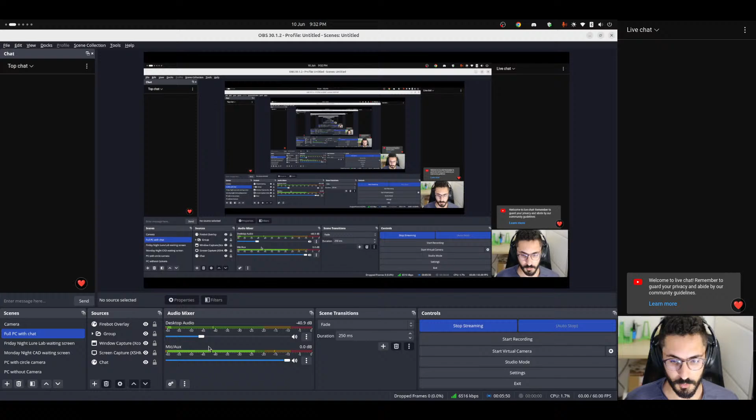No, didn't work. Wait. Okay, it's working. I don't know what's with this camera. It wasn't working on Friday, and then yesterday we did a Twitch stream for like 6 hours and it didn't freeze once. I have no idea what's going on with it. Let me open my chat so I can reply to you guys. Oh, why isn't it opening? What? What's wrong today? Okay, cool. We can start. It was a wild day.

So where did we stop last time? We were building this lure turner for making fishing lures, and we're almost done, by the way. We need a couple of things here just to refresh my memory. I should probably prepare before the stream, but yeah, what the hell.

So we still have to add this part right here, which is gonna have a ball bearing. I'm thinking it could have two ball bearings because the previous version had one and it could wobble a bit, so adding a second one would be a great idea. So two ball bearings here, and we need something to attach the hook to.

I'm thinking I'm gonna go the same route I went with the previous lure turner, which is making it as a screw, modeling it as a screw on both sides, from this side and from this side. And as I said, two ball bearings so it can rotate.

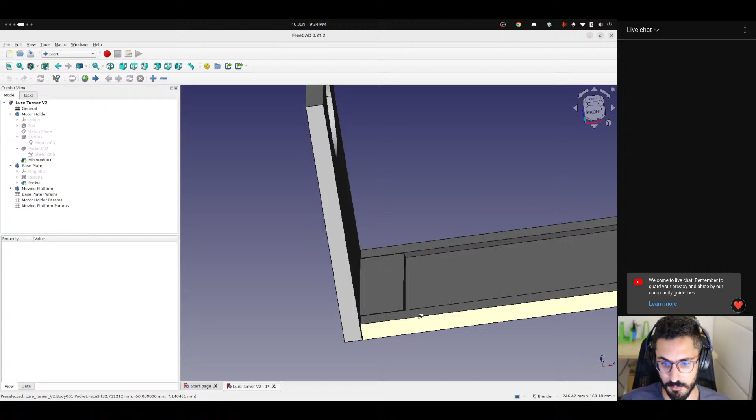Let's see, I might add support to this to make it more stable. Maybe something like this goes from here to here to support it. What else do we need to do? What else?

Just to give you a heads up, today I'm not thinking straight at all. Actually, here's a story. So I had an appointment this morning. I had two things actually, one at the office and another at the ministry.

So I had to be at the office at like 9:30 in the morning, and then at the ministry I had to be there by 1:45. So I went to the office, it's like about 10 a.m. or something like that, I've finished my thing. And I know the appointment at the ministry is at 1:45, but somehow in my head things got mixed up, and I was like, okay, I need to be there in 2 hours, but it's like 4 or 5 hours ahead. I'm like, I need to be there in 2 hours, I don't know how I calculated this. So I texted my wife, hey, you need to be here in like an hour. So yeah, we spent about 4 hours just wandering around.

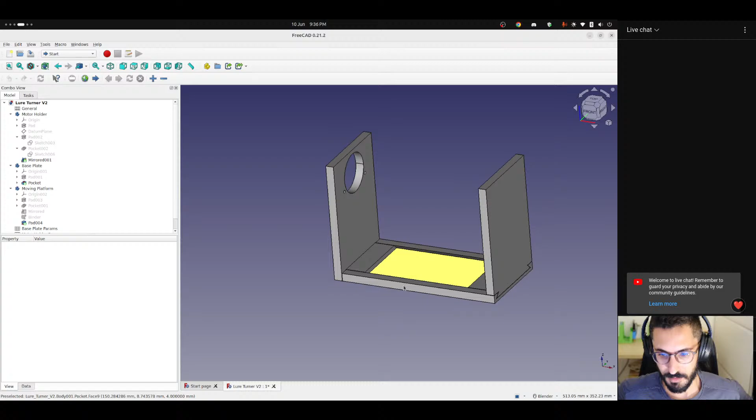What else do we need to do? Yes, it's an important one. So we decided that these moving platforms, or the base plates, we can stack them up. We can have 2, 3, 4, however long we want it to be, we can stack them up. So we need some way to attach two of these together.

Yeah, let's see what we can do. Hopefully we can finish all of this today. So what do we start with? I'm guessing we can start with this.

Let me just refresh my memory on how we did this, motor holder parameters. Motor offset from top is 5, and then we have a motor diameter, and then we calculated some values here, this screw hole distance, motor offset from top. Okay, and how did we do...

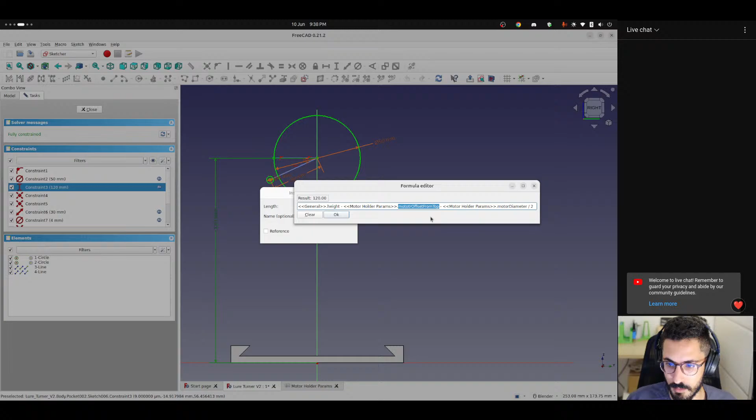This sketch? Yes, Z value here, what was it? It was the height minus motor offset from top minus motor diameter divided by 2.

Hello, I just joined. What kind of motor are you planning to use? Okay, hello Odd Lures, and the motor that we're planning to use is called... was it asynchronous or synchronous?

Yeah, this one, this thing, it doesn't have to be this exact model. There's like millions of them on Chinese websites, but yeah, it's an AC motor, sorry. I guess it could be 110 volts or something, the US voltage. But the shape I think will remain the same, and we're doing it parametrically, so I can show you. Everything here is parametric, we can change anything.

Let's see, base plate, I forgot the parameters. I can change the height, for example, to like 250, and then everything will re-render. Okay, I have a sketch that I forgot to hide. What was it? 150. I'm gonna leave it at 150 for now.

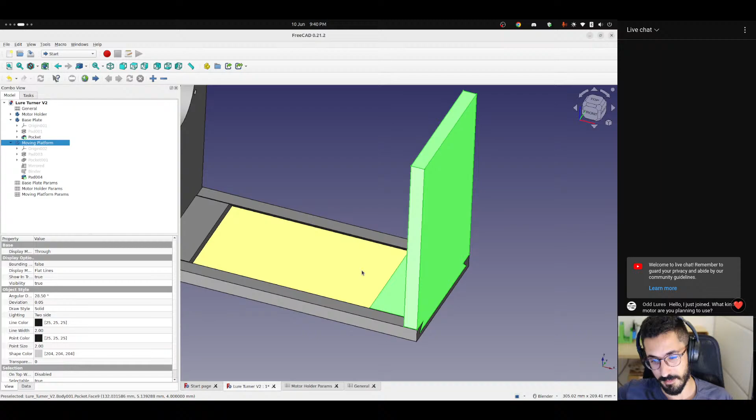But yeah, we can change anything, and the plan is, as I was saying, this part right here, the moving platform, it's not static, it moves actually on this platform. And the plan is to have as many of these moving platforms as necessary, so you could put one lure on this platform and then put another lure on another one behind it, and then somehow we need to let them attract each other.

So I'm thinking it's either gonna be like a screw here and then you squeeze it by hand and tighten it down, or we can have rubber bands going from this one to this one. It doesn't have to be a rubber band, it could be a spring, for example, connecting this part to this part, and then you can stretch it, put the lure in the middle and let it go.

And you can do the same with the rest, and then you can have like 10 lures rotating on the same motor. That's the plan. And it doesn't have to be one lure, because we're gonna create attachments, so we can make an attachment, for example, that can hold 2 or 3 lures on the same platform.

Nice, I have just tested FreeCAD a bit. Beginner in CAD, I used to designing masters in Blender, so this will be some good learning for me.

Yeah, so FreeCAD definitely has a steep learning curve, but once you get the hang of it, it becomes super easy. They already merged lots of fixes to the master branch on GitHub, so it should be released soon, version 1.0, which is the first stable version of FreeCAD, hopefully, and it's gonna be awesome. They're doing lots of work on user experience, especially for newcomers.

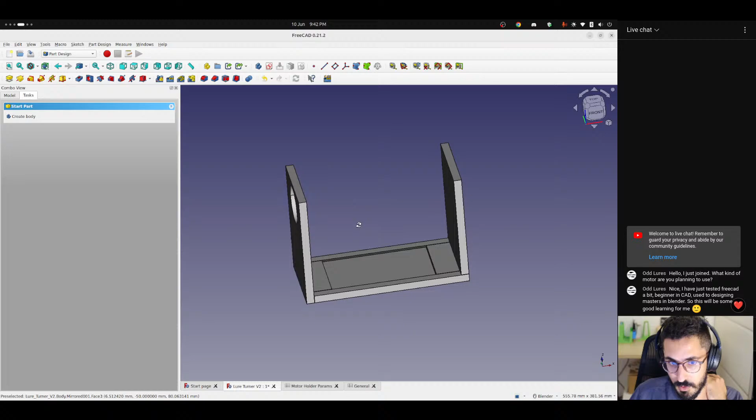But for now, basically, I have a rule: never select a face and draw a sketch on it, never reference an edge, never do any of that, because in the current version of FreeCAD, you can technically do it, but it might break everything if you modify something. That's the only way at the moment to achieve a parametric model, is to draw everything according to parameters and not referencing anything.

Like, for example, this motor right here, motor hole, if we check the sketch, we can see that it has a height and a diameter, and these heights and diameters, we have them here. We're referencing them from separate spreadsheets. Now we're gonna do the same for the hole that we're gonna do here.

So let's do that. Moving platform parameters. So at the moment, for the moving platform, we only have the rail length, which is, let's set this to 60, which is this thing here.

So we need to add the hole. Let's see, moving platform parameters. But do we need to add it here, or should we create a new spreadsheet for it, because it's another part? It's a different part.

I think we're gonna create a new spreadsheet. Let's create a new one. Let's call this the tool. What are we gonna call it? Tool what? Basically, it's gonna be a screw that will hold some attachments. Not tool, let's call it the rotating bit or something. Rotating screw.

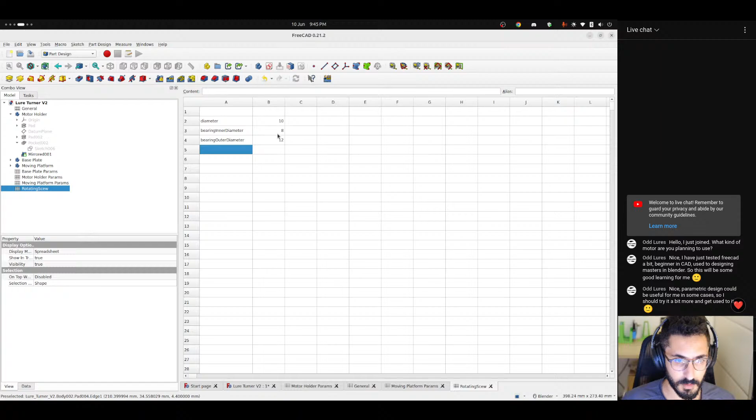Or actually, no, we can have it diameter, bearing inner diameter, bearing outer diameter. So the hole that's gonna be cut here will be based on the bearing diameter. But the diameter of the part itself, it doesn't have to be this, it could be something else. Bearing inner diameter, bearing outer diameter, let's say 8 by 12. I don't know, I'm adding random values. Let's say this is 10. What else do we need? For now, I think this is enough.

And we need to add the aliases, but we need to call them an input for now, similar to what we did in the previous stream. So these are all inputs. We need to validate the input before we can do anything with it. So now let's do that. Usually I use the C field. I don't know why, because I can just hide it like that, so I don't modify it by mistake.

So let's see, what is the minimum value for diameter? Let's see, we need a minimum value of 5. No, maybe bigger, yeah, I think 5 is fine. So we can test that. If we set it to 0, it should be 5. Cool.

And this is gonna be the actual diameter. I love how FreeCAD uses spreadsheets instead of using their own UI and stuff for adding parameters. It's so freaking powerful. You can add tons of formulas, like calculate absolute values and stuff.

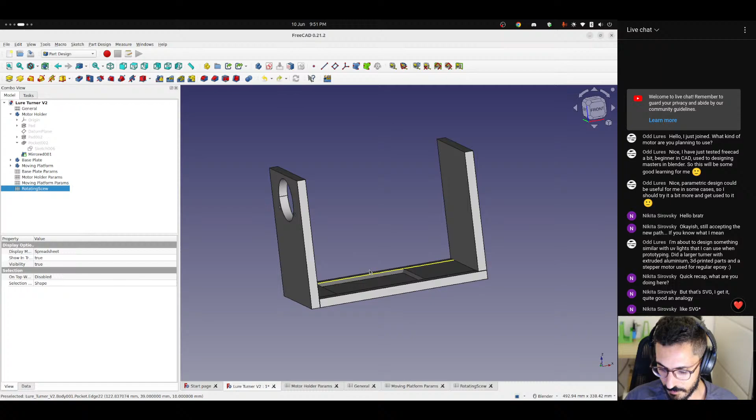But that's SVG, I get it. Quite a good analogy, like SVG, yeah. Definitely a good analogy.

So what we want to do now is the moving platform. We have multiple objects at the moment, this object and this one, and I want to add a cut here. Let me see... I don't have any planes here at the moment, so I need to create a plane. But first, let me see where the origin is. Oh no, we don't need a plane. Cool, so the origin is here.

This is one of the things I also love about FreeCAD: if you're using part design, each object has its own origin, its own X, Y, and Z. If you want to move the object, you go to data, placement. For example, at the moment I have the X position taken from a spreadsheet, but let's move it on the Z axis, and you see the entire thing with its origin moves up. So now we have the origin here, I don't need any extra planes or stuff. I can just create a sketch.

Oops, sorry. Yeah, so we need to activate the body in order to be able to do something with it. XY plane, so now we're drawing on this face right here, and we can do that.

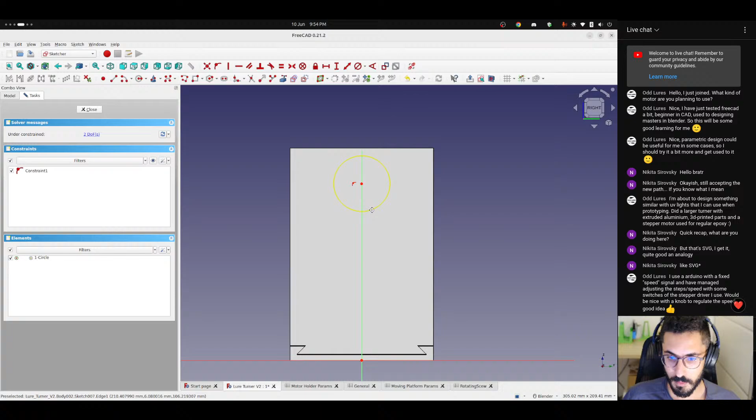I use Arduino with a fixed speed signal and have managed adjusting the step speed with some switches of the stepper driver I use. Would be nice with a knob to regulate the speed. Yeah, the knob is amazing. I mean, if you can do that and put it in a really good package, a production-ready package, you can basically sell it. I guess lots of people would buy it and pay good money for it. Good business idea 2024, don't steal it.

Okay, diameter. So we want this. We want to get it first from the spreadsheet, I called it rotating screw, and we want the bearing outer diameter, but we want to add some tolerance. Now I have a tolerance value in general, but this is not a tight tolerance. For the bearing I want it to be tight, so let's add the bearing tolerance here. It's something like this, a very small value, so we had to hammer it in to put it in place. And let's see, this is gonna be maximum of bearing tolerance input and the value of 0.05.

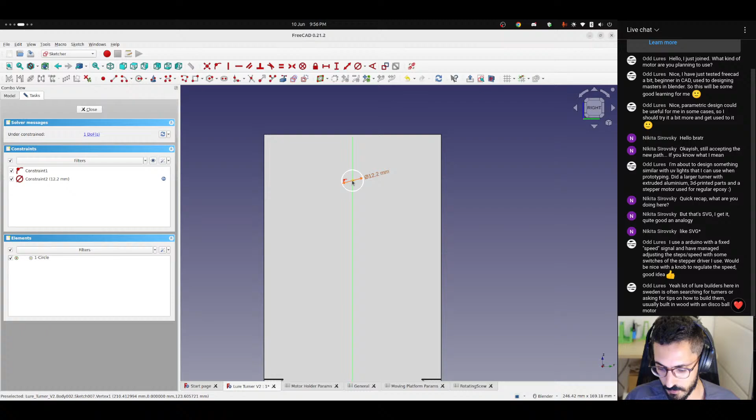Yeah, a lot of lure builders here in Sweden are often searching for turners or asking for tips on how to build them, usually built in wood with a disco. Man, Sweden, I love Sweden. You're from Sweden, you're so lucky. It's like the best, I guess, pike fishing destination. My friend is on a fishing trip to Sweden. I don't know if he's back or not, but he sends me a lot of pike pictures.

Okay, so the height of this is gonna be exactly the same height as the motor. So we did that. How did we do that? We got it from general.height first, so now we're here at the top. And now I remove from it something called... what was the name of the spreadsheet? It was the motor holder params dot, was it offset from top. So now we applied an offset, I think it was like 5 mils or something, but we can change it. And now we need to go down by the radius to get the center. So this offset is more of a margin than an offset, I should probably rename it. And this is gonna be the motor holder params dot motor diameter.

Is it this low? No. Oh, I forgot to divide it by 2. Wait. Huh. No. This one, divided by 2.

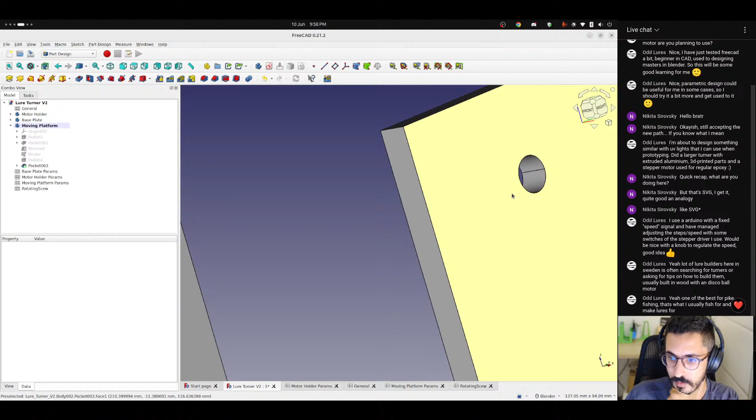Okay, cool. Now one thing we didn't take into consideration is... we didn't take that into consideration. So we have a thickness here, and we have 2 bearings inside, each with a width. I'm guessing we need to modify this so it takes the bearing width into consideration. But we'll do that in a bit.

Yeah, one of the best for pike fishing. That's what I usually fish for and make lures for. Yeah, and you guys have lots of lure builders also, and you guys make amazing lures.

Okay, so let's do that real quick. I think it was this pad right here. This was this. Wait, no, sorry, this was the sketch. Yeah, so this is the pad. And how much are we padding? We have to click it open. Interesting, just 10. Wait, what?

If I go here and change the thickness to 20, what's gonna happen? Recompute failed. Interesting. Okay, looks like I forgot to do some stuff. Let's see. Pad here, it's gonna be general dot thickness.

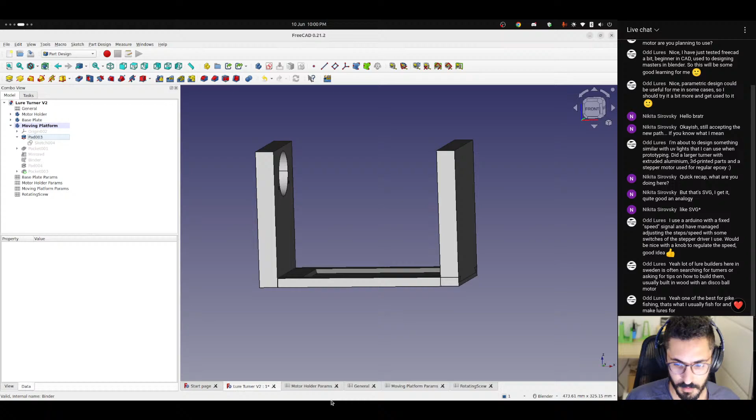And what about the base plate? I think it doesn't have its own thickness. What did I do? Base plate, pad, it's from a sketch, and this 10 is what? Oh, base plate has its own thickness. Okay, close.

So this one should be fine now. Okay, cool, go back to general, change the thickness to 10. Recompute failed. Why? Why did you fail? Huh. Interesting.

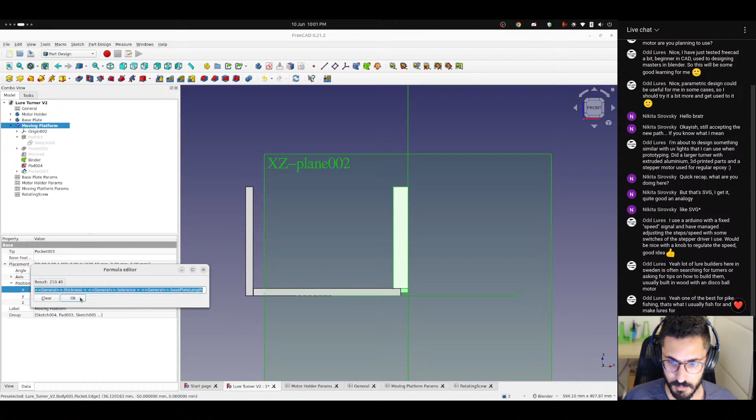So something is wrong here apparently, let me check the position. Let me check how I moved this here. So start by a thickness, then a tolerance, then the length. Yeah, that seems right, but it's in the wrong place. Let me recompute. Recompute failed. Interesting. Moving platform 25. Recompute failed. This shouldn't happen.

It's not changing anything. When I click reverse, it renders correctly. No, it doesn't. Huh. Let's see, how are we gonna debug this? So the origin is wrong also. It should be right here, and there's no reason for it to be back here. Yeah, there's no reason for it to be here.

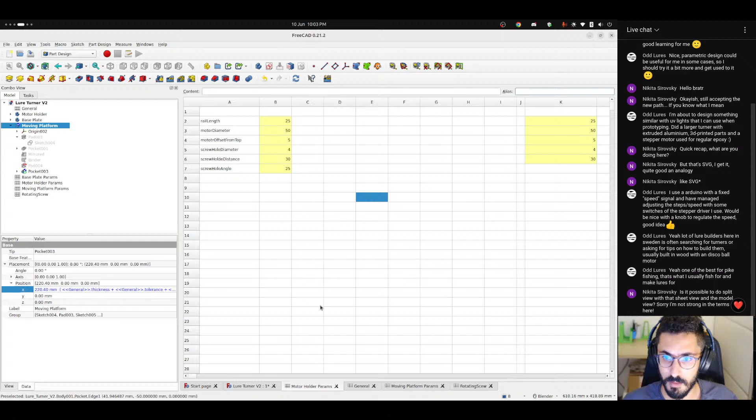Master of over optimization.

Okay, but no, seriously, there's no reason for this to be here. Recompute object failed, what? Okay, this is bad. Why is it here? It should not be here. No. It should not be here. Bad thickness. Okay, but what did I change? This was 10, I changed it back to 10. What?

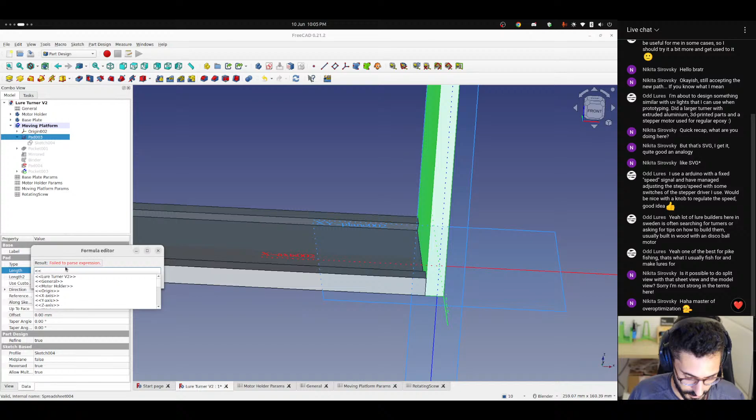General dot thickness. It's gonna be something silly, I know, because today I'm not thinking straight since this morning. I can probably just redo it, but I don't want to do that. Why?

Okay, so coming to here, this binder has the correct placement. It's tolerance plus length plus thickness. That's exactly what we have here. Thickness, tolerance, and length is the same. Wait, what?

Minus thickness? Oh wait, yeah. No. Yeah, no, it should be minus thickness because here we should start from this point and go this way by thickness. So this isn't correct.

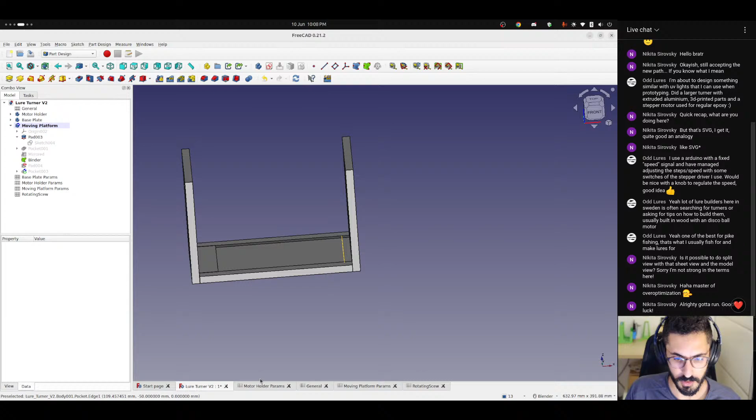No, it shouldn't be like this. No, it's not, still it's not moving anyways no matter what I put here. So tolerance plus general dot thickness. I have to know what's wrong. What did we change? We changed the width, right? We changed this to like 200, and then we reverted it back.

Yeah, looks fine. Huh.

That is the weirdest bug I have seen. And it's probably because... let's see. No.

Oh, wait. Wait. What is this? I think I got it.

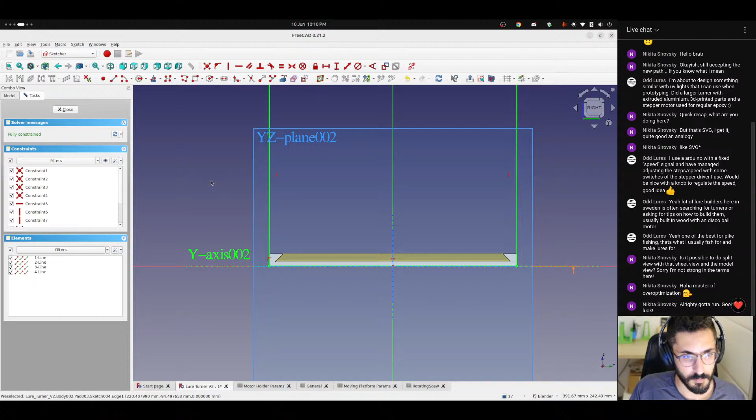Let's see. This is fine here. No, it's fine. So this pocket is fine. Let's hide the binder and the sketch.

Okay, so until this point, it's fine. We mirrored it to the other edge. Okay, we got the binder. Why is the binder in the correct position? But this entire thing is not in the correct position.

Okay, so I deleted the pad for this binder. Now if I pad it again... but that doesn't make sense. I just deleted something and added it again.

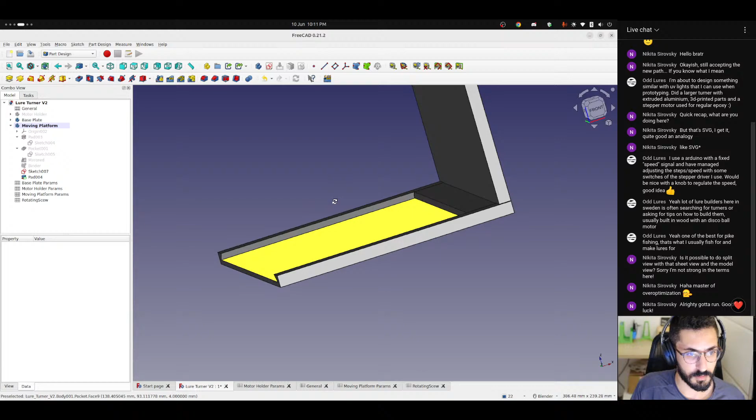Moving platform dot rail length. Okay, now it works. What? I mean, I didn't do anything.

Yeah, things like these is what FreeCAD must fix.

So the model was broken for no reason. It makes no sense. So I deleted the thing it was complaining about and then did it exactly the same way, the exact same way, and it worked.

Anyways. Yes, so now that we have the motor holder—not the motor holder, now that we have this hole done—we can add a new body, and we should probably rename this to rotating screw params.

This will not break anything, right? No, cool. And maybe to follow the naming convention, add spaces. Okay, cool. So now we have a body, but this body is right here at the start. We want to move it here.

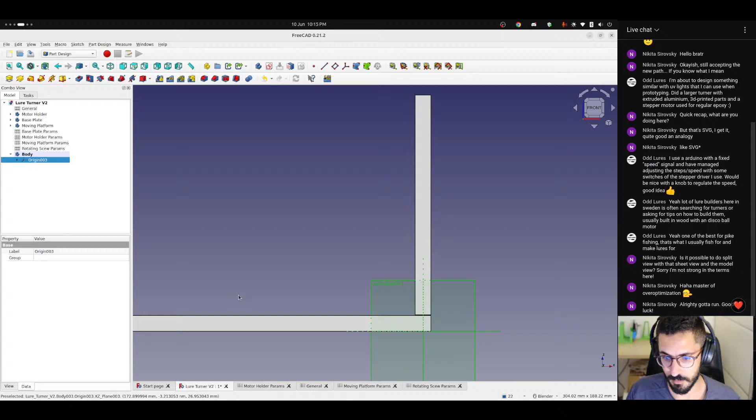We also want to move it up. So in the Z direction of the placement, we want to go up by general dot height minus motor holder params dot offset from top minus motor holder params dot diameter divided by 2, the same value we used to create this and this for the center.

Now it's exactly in the center. So that's from the top view. You can see it in the center, and also from the side view and from the back view. Okay.

Now we need to create some stuff. Let's see what did we define. So we need 2 bearings.

We have a diameter for... we have a bearing outer diameter and a diameter. So it's gonna be—let's do the bearings first, and then it's gonna become more obvious. So we need to put a bearing here and a bearing here. So how are we gonna do this?

We can create... do we want to create an additive cylinder? No, let's just do a sketch. So I'm gonna show the origin again, and if I create a datum plane, then select the YZ plane.

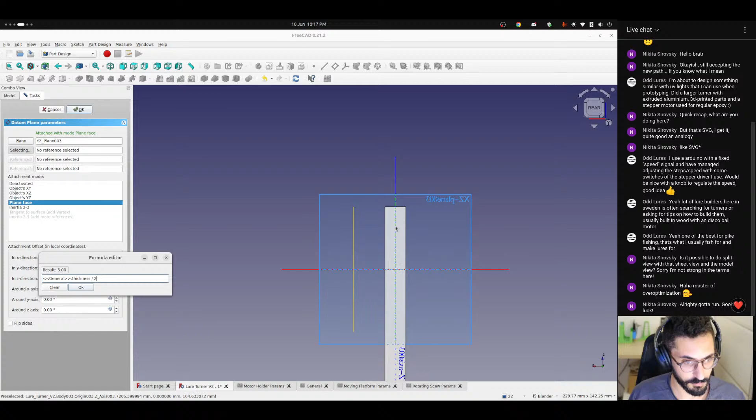Basically by half a thickness, so general dot thickness divided by 2. And now we're here. Let's hide the origin.

Okay, so if I select the datum plane, even though it's hidden, and then click create sketch, we're actually attaching it to this sketch. So we need 2 circles here, the inner and the outer diameter.

Let's constrain the outer diameter first. So this is gonna be, what was it, the rotating screw param dot bearing outer diameter. And the rotating screw params dot bearing inner diameter. Cool. Close it.

Oh wait, we need to call this bearing. Yeah, that's fine.

Interesting. I didn't think this through.

Because the thing with FreeCAD is, in the same body, this blue icon, you cannot have two solids. So now I'm trying to create two bearings and then the part in the middle. But we can't do that actually. My bad, we cannot do that.

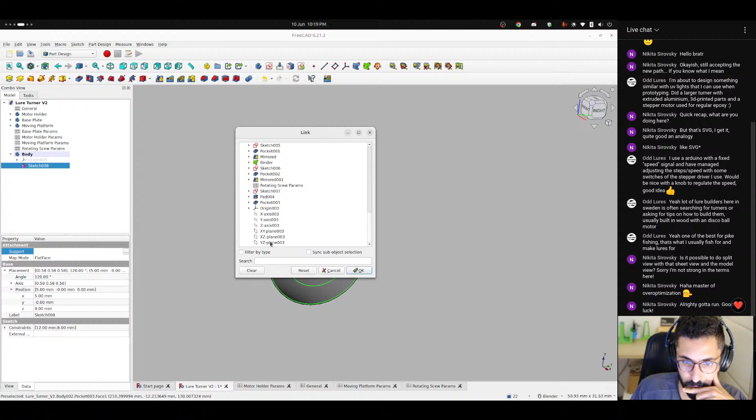It's the YZ plane, I think. Yeah, it's the YZ plane 3. Yes, this one. And now we can move the body in the X direction by thickness. So basically I moved the body here.

And now we can pad this inwards by rotating screw params dot bearing width. Yeah, this is gonna be an issue. We'll fix it in a bit.

Okay, for the other part, we can simply clone it and move it. Let's see. So we can clone the body, and now we want to move it in this direction, which is the X direction. But how much do we want to move it? We want to move it, I think, by the thickness, right? Minus the bearing width.

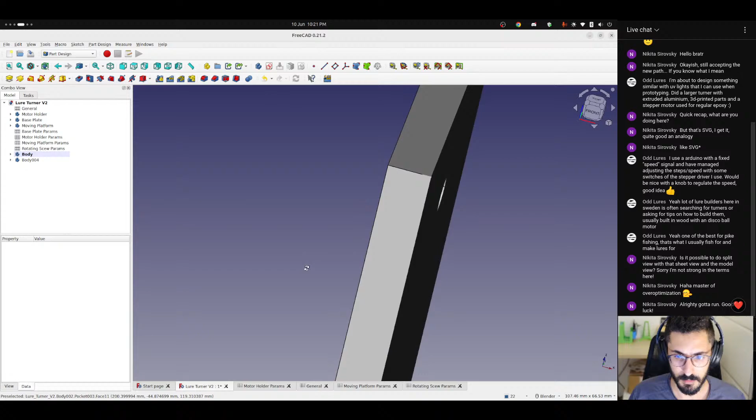Okay, but now the bearings overlap because the bearing width is 6, so 2 of these is 12, but this is 10, so we need to add a condition here.

Now we can change the general condition, or we can make a condition just for this, but I'm gonna change it in general.

So the width, no, the thickness. So what is the minimum thickness? It's going to be a rotating screw. We need to get that from rotating screw params, the bearing width multiplied by 2. This will be exactly 2 bearings, and then let's give a padding between the bearings of 1. So now it's 13. This is our minimum thickness.

But we have a problem. What happened here? Let's see, body 4. This is interesting. Wait, I might have done the calculations wrong.

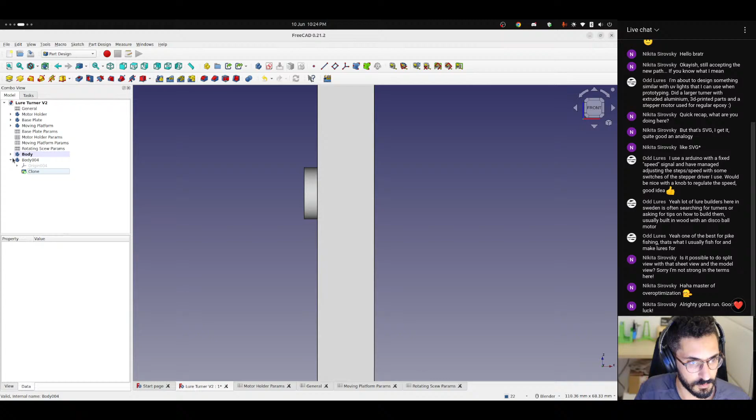Interesting. Position. Oh wait, this is not parametric? Cloning should be parametric. You know what? I don't trust FreeCAD.

I'm gonna create my own body. Move it in the X direction by general dot thickness plus tolerance plus general dot base plate length.

Wait, this is gonna be here. I wanna get it back here, so basically I don't have to add the thickness. Cool.

And in the Z, we need to go by general dot height minus motor holder params dot offset minus motor holder params dot diameter divided by 2.

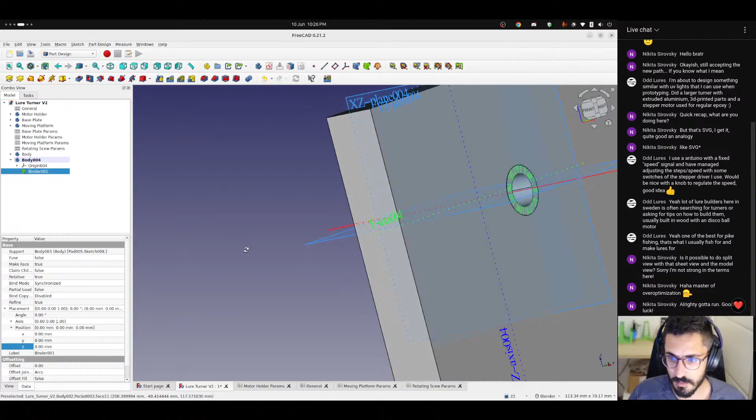Okay, and now we can take this sketch, create a subshape binder, and now we can just move this by... is it minus? I think minus general dot thickness. Let's see.

Yes. Now we can pad this inwards by the rotating screw dot bearing width. So these are the ball bearings. Let's make them smaller. Let's do 4 mil. 6 mil is okay. What now?

Okay, this subshape binder is causing lots of issues. I might stop using subshape binders. Did it work for the bearing? It worked for the bearing for some reason, but down here it doesn't work. So, yeah.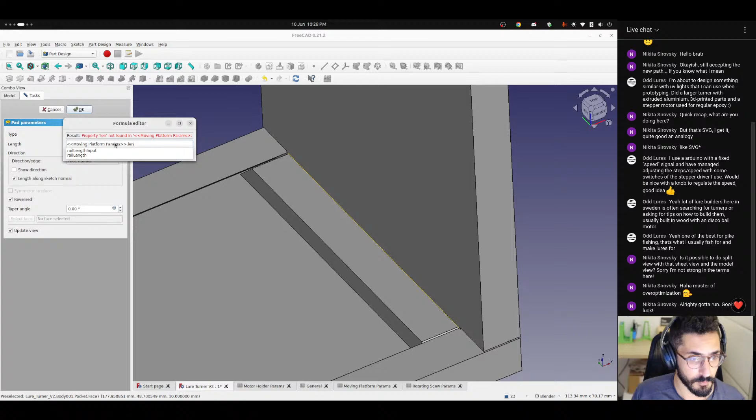We have to remove it. Is the pocket still there? Yeah. Now we can pad this again. Need to make this active or it will not work. Reverse direction. But I have to fix this at some point. I can't just keep deleting it and adding it again. This is the second time I do that.

Okay, anyways, let's ignore this for now. So we have 2 ball bearings. We should probably give the bodies some color. Let's rename this to bearing 1 and this one to bearing 2, and let's click the motor holder.

Random question: do you work or study? How did you get into CAD 3D design?

Thank you for the question, and it's fine even if it's random. Actually, sometimes it helps me concentrate if I'm talking. So I work, I'm a software engineer. And how did I get into CAD? It's because of lures. So I was making fishing lures from wood, but I hated the process of making wooden lures at home.

Yeah, I think red is fine. Not just because it's too much work, too much handwork and stuff, but because it causes a mess and you need lots of tools and stuff.

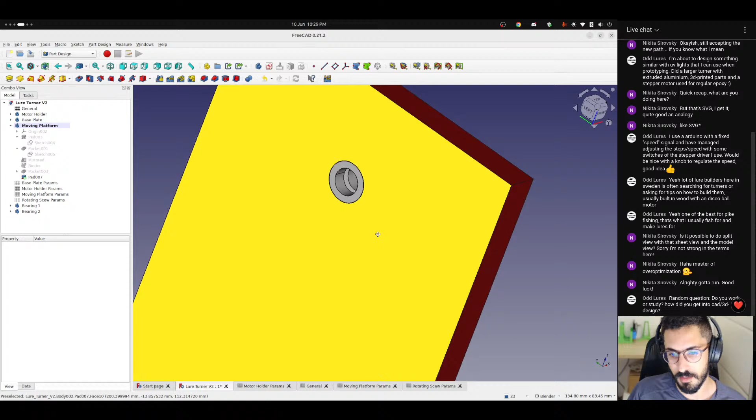So I was like, okay, initially I thought, what if we could CNC machine a lure from wood? Because I saw someone do it on Instagram. I'm like, I'm curious, I want to do that.

I had heard of Fusion before from someone called Malossi Lures. Not someone, they're two brothers, I don't know if you follow them on Instagram, they make amazing saltwater lures.

So I said, you know what, I'm gonna learn Fusion. I did that, I made a lure, and I actually tried to CNC it. I went to someone, gave him the files and told him to do half on one side, then flip the piece of wood and do the other half on the other side. It took a couple of tries, but he did it, and it cost me so much money. I'm like, no, CNC machining is not the way unless I get my own CNC, and then it's gonna be another type of mess.

So that's how I ended up buying a 3D printer. And I enjoyed the process of creating 3D models more than making the actual lures. That's how I ended up here.

And then I was using Fusion 360, but I wanted something where I can own the files, because I was planning on selling the files at first, and with Fusion you need a license for that.

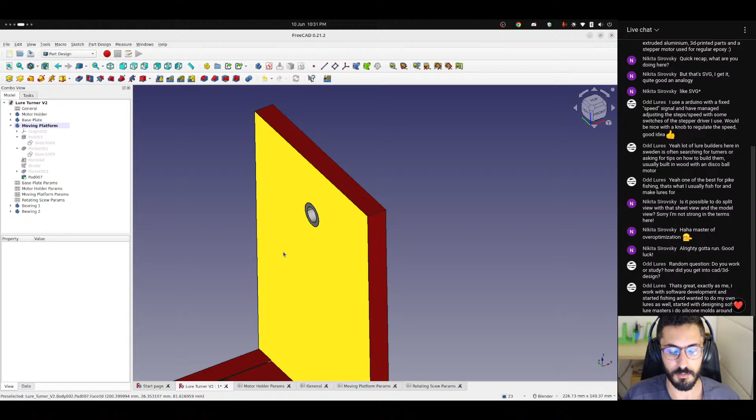So that's how I ended up learning FreeCAD. But FreeCAD for lures is very tricky. I tried to do it, it's not that great for curves and stuff. There are workbenches, like the curves and curved shapes ones. Yeah, these two workbenches, you could probably make a lure from it, or just by lofting a couple of shapes.

But I decided to learn Blender, and when I started using Blender for lures, I just stopped using CAD. Blender is amazing.

That's great, exactly like me. I work with software development and started fishing and wanted to do my own lures as well. Started with designing soft lures, masters, and I do silicone molds around them.

I used Fusion in the beginning as well, but found it's easier to learn Blender. Yeah, I mean, easier to learn Blender.

I think it's not easier, unless you're talking about super complex shapes, then yes, it's easier to make complex shapes in Blender than in Fusion. But I think Fusion is very user friendly, like anyone could use it. Blender, on the other hand, there's a learning curve to it. I mean, we as software devs, tech savvy people, could probably pick it up fast, but other people might struggle a bit.

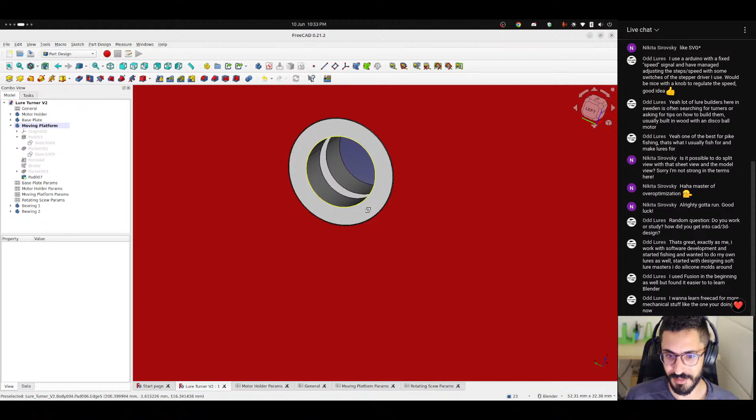Yes, this is exactly how I use FreeCAD for mechanical stuff specifically. And so far, regardless of these random bugs that happen, I should probably save, by the way, because I had a couple of crashes on live streams. Only on live streams, I have no idea why FreeCAD never crashed on me except on live streams. Probably because of OBS and all the stuff that's open on my PC when I'm streaming, but yeah.

So yeah, as I said, when we're working in Part Design, which is the workbench I prefer to work on, it's different than when working with Part, because here every single solid object has to be its own body. So now I want to create the screw thing, so I need to create a new body and probably also move it into place. So again, I need to go to Data, Position, blah blah blah, lots of repetition.

General dot thickness divided by 2, if I remember, then tolerance. Lots of math when doing this.

General dot base. Now this project doesn't have lots of math in it. I had projects where I had to get a piece of pen and paper and start writing math equations to figure out a formula to get something to work. It was cool though, I liked it.

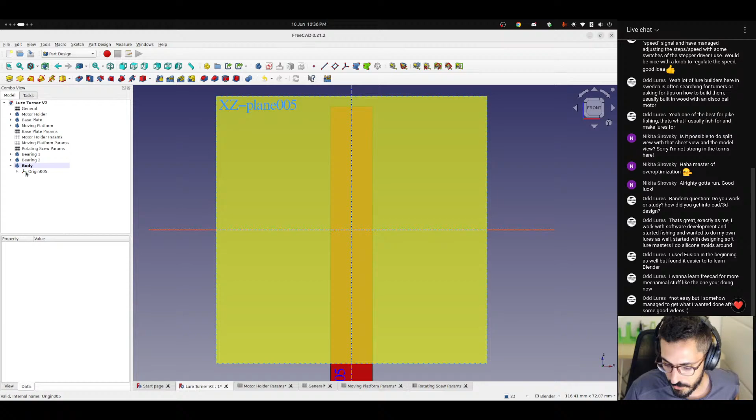Not easy, but I somehow managed to get what I wanted done after some good videos.

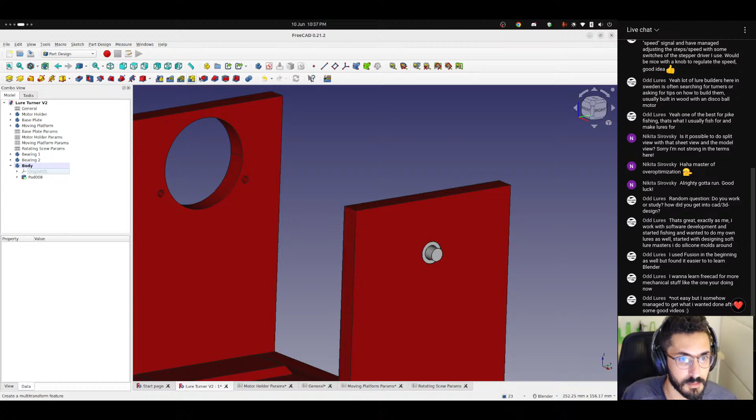Just to see, because I haven't tried it, but I remember I did try it once. It didn't work, maybe it could be something else. So if we do this, then we draw a sketch here, for example. Wait, what? Yeah, sketch here. Why isn't it... okay, now it's working. And then do that.

This is just a test. Let's see, so if we do this, can we mirror both? Mirror. So we need to mirror on the YZ plane. YZ... no, yeah, that's the problem. Oh, because it's mirroring one feature, which is the pad 9.

So if we add a pad 8... oh, okay, we can do that. It's possible, cool. So we can—wait, delete this, delete that, delete this, delete that, delete this. So yeah, we can model everything on one side and then mirror it.

So let's start with adding dimensions. The first thing we need is this section right here, and this is going to be the inner diameter of the bearing. So rotating screw dot bearing inner diameter.

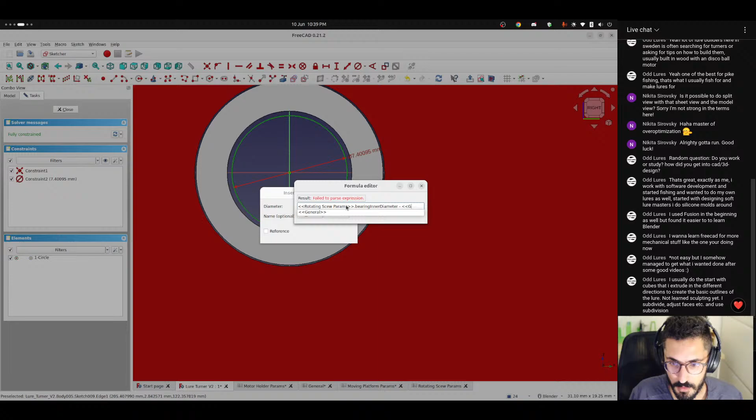But we need some tolerance here. So I remember we had a tolerance, or you know what, I'm going to use the general tolerance multiplied by 2.

I usually do start with cubes that I extrude in different directions to create the basic outline of the lure. I haven't learned sculpting yet — I subdivide, adjust faces, and use subdivision. I get a quite good result, but I'll try to learn some sculpting to improve the details.

Yeah, no, I'm not talking about sculpting. Sculpting will definitely improve the details, but what I'm talking about is I used to do exactly what you're doing — start from a cube, add a couple of lines, right? Subdivide it and then move the vertices.

It's the exact same process, but after you add the subdivision surface modifier, you know what — it's not a Blender tutorial, but what the hell. So if I add a cube, let's apply the scale, always apply the scale. Let's say something like that.

And then you would do something like this, right? And then maybe something like this. Okay, and subdivide, Control 4. Okay, cool. So now you can go ahead and move stuff around to get the shape, and you can also do symmetry here, right?

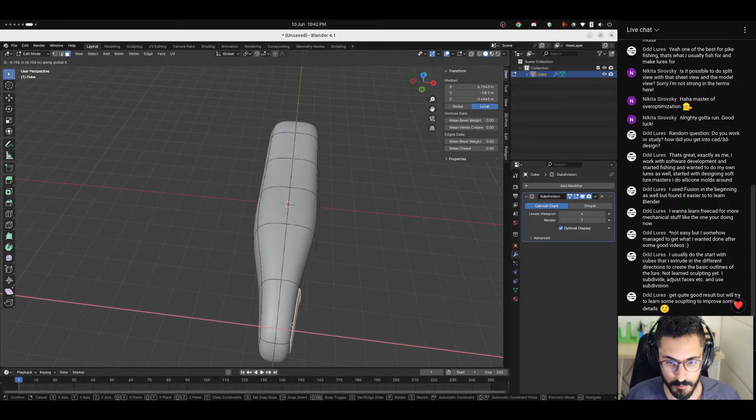Move it down a bit. And then you go to edge select, select this edge, move it down, select this edge right here, move it down, something like that. You can do the same on this side, move it on the X. But I prefer to use edges in this case. See how easy that was?

Anyways, back to mechanical parts. Something is wrong here because this is 0.2, this is 0.1, but it's not actually double. Tolerance times 2. Interesting, let's see what we did wrong.

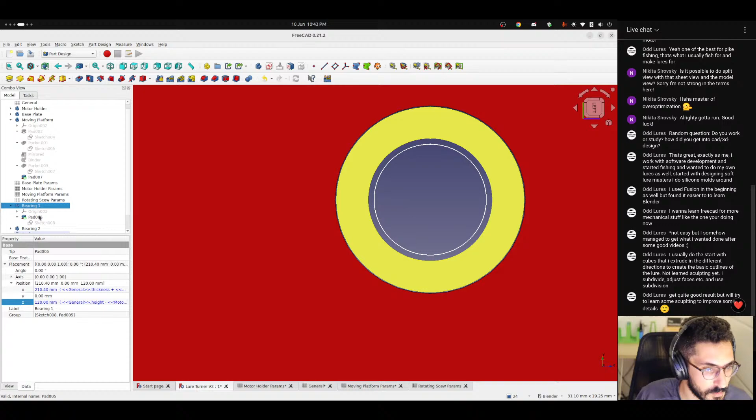Oh, it is, it is times 2. What? Looks... is this the double of this? I don't know, just to be sure — bearing inner diameter. Oh, did I add... did I add anything here? No, anyway, never mind, I could be wrong. Maybe it's... maybe it is.

So we need to pad it. Which way do we go first? Should we go outwards or inwards? Let's go inwards, so pad it inwards. We need to go until this face right here, and then some tolerance ahead of it. So that's going to be thickness — no, general dot thickness divided by 2 plus the tolerance.

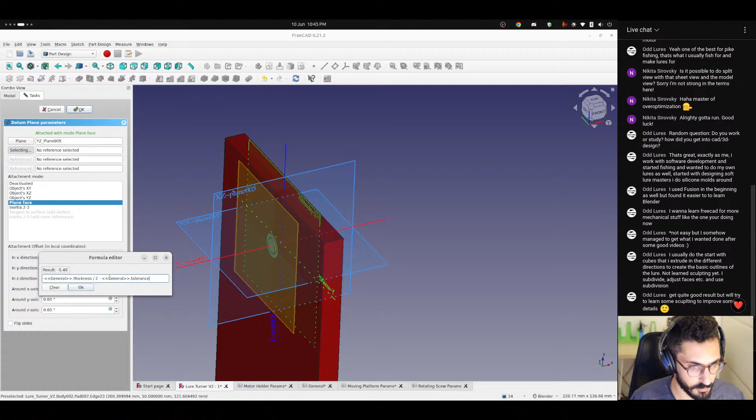Okay. And now, what was the weird bug? It's gone. And now we need to create a datum plane, attach it to this plane right here, move it in the Z direction, negative Z direction, by the same amount that we did — so general dot thickness divided by 2 minus general dot tolerance. Okay, hide the origin, hide the plane, create a sketch.

And this is going to be our actual... what was it called, the rotating thing, the diameter. This is the actual diameter of the screw. And we don't have, at the moment, a screw length. Let's do 10 or 15.

It's our input, and the output will be, basically the way how I do it with complex forms. That's very useful. We'll try to join the live stream. Missed the last one, that looks interesting.

Yeah, the last one was interesting, but I messed up the scales a bit, even though I did them manually one by one, which should create better scales, but for some reason they don't look better. The best scales I did was this lure right here. I think the reason they were this good was because the scales are big.

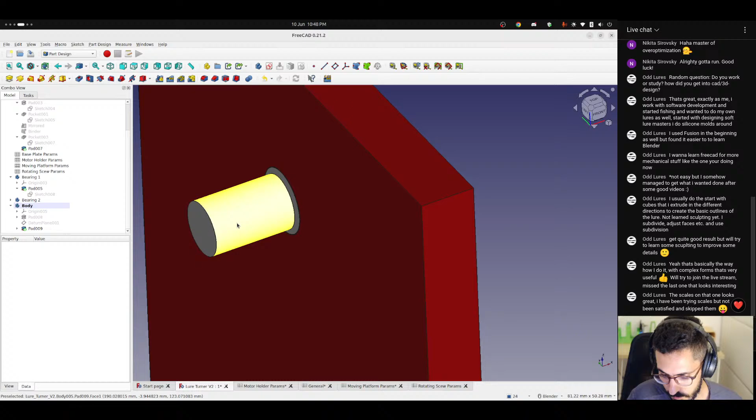The scales on that one look great. I have been trying scales but haven't been satisfied and skipped them. Yeah, there are many ways to do scales in Blender, but...

It's, how do you say this? So you either have to get really good scales, your only way is sculpting at the moment. But what you can do is similar to this, but it doesn't look that good. I did this in Inkscape, basically it's an SVG, or I exported as a PNG, but it could be an SVG. It's a semicircle that repeats in a grid, like on the X and Y, and it's seamless.

And then this becomes a texture when I import it to Blender as a texture, and then use it on the brush, and then I can brush them on simply, like just swipe it on, and it will look like this. So I'm trying to create a texture with these scales, basically. Then we can swipe it on any lure. That would be amazing.

Okay, now we need to turn this into a screw. To turn it into a screw, we need a pitch. And what else do we need? So basically, I mean, we can download the threads thing, but I like to model my own threads because I can make them printable. So we can do that, if we can draw a sketch here.

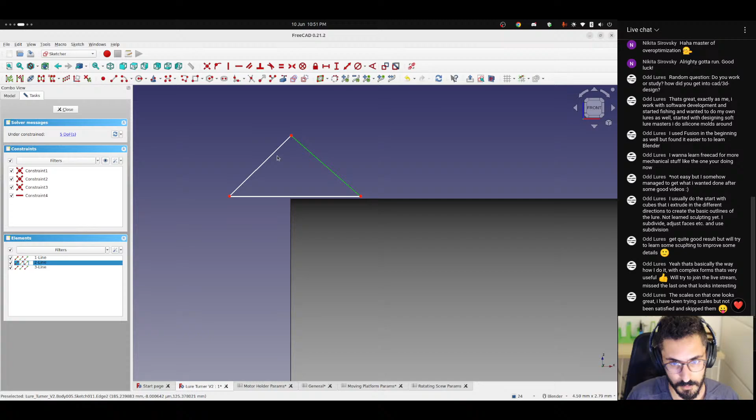But the thing is, no, wait. Delete. I think the best option is to do something like this, something like that.

And I'm gonna add a construction line because I want to put this point right here, and I want these to be symmetric. So we're gonna make this construction geometry, we don't want it included. I'm gonna take this point and this line, make them symmetric. Basically its midpoint. And then this point, this line, and make it symmetric.

So we can put this point here, and we can define an angle and height. So for the angle, uh, 30, no, 55, 45 I think. 45, this is gonna be the maximum angle I can go. 30 would be too extreme, I think. This should be fine.

But you can't use the brushes on meshes with unapplied modifiers, right? And I will now stop talking about Blender. No, it's fine, it's fine. Don't stop talking, don't, it will become boring.

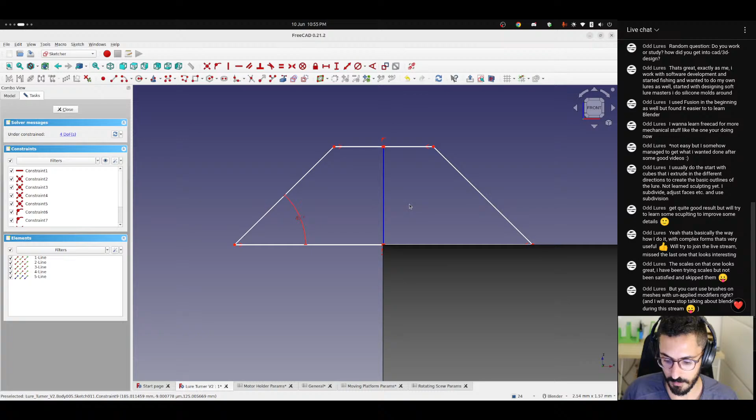At some point I would save an incremental version of the file, apply the modifier, which will give me the finished mesh, and then I will start adding eye sockets and stuff like these. All the Boolean modifiers, but I do not apply the Boolean modifiers, ever, unless I want to test something temporarily without saving, then revert back. I don't apply them because I might want to move the weight position, or move one of the hook hangers, but everything else—the base shape, the sculpting, the scales—all of these are applied.

Okay, where are we? This thing, yeah. We want to constrain this point, basically. Let's see, the height of this is going to be diameter divided by 2, and then this distance is going to be—oh no, not the bearing width, sorry—it's going to be general dot thickness divided by 2.

So now we're here, and now we need to add a tolerance. So general tolerance, and the rotating screw dot screw length. Yeah, we're exactly where we want to be. Cool. Okay, that might be an issue later, but anyways.

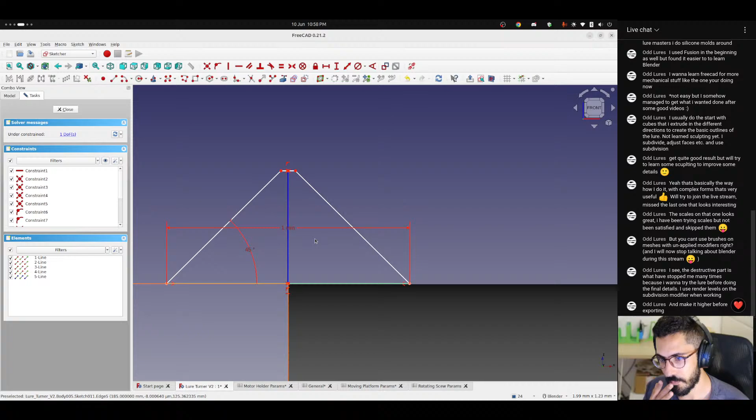I see the destructive part is what has stopped me many times, because I wanna try the lure before doing the final details. I use render levels on the subdivision modifier when working and make it higher before exporting. Okay, I see what you mean. So you think you might want to modify the base shape when testing, not just the position of the weights and the hook hangers. You can technically still do that, but with a highly detailed mesh it might be a bit slow on the computer, but possible.

Because in Blender—this is the same analogy I did before with FreeCAD being like an SVG—Blender is like modifying an image. It's like Photoshop; you can do whatever you want with it even if it's already done. So you can technically, let me add like 5 subdivisions here, and scale it on the Y, for example. Oh come on, what happened?

Let's say you applied this, right? Oh oops, no, not delete it—apply it. You can still go to edit mode, go to X here, select these.

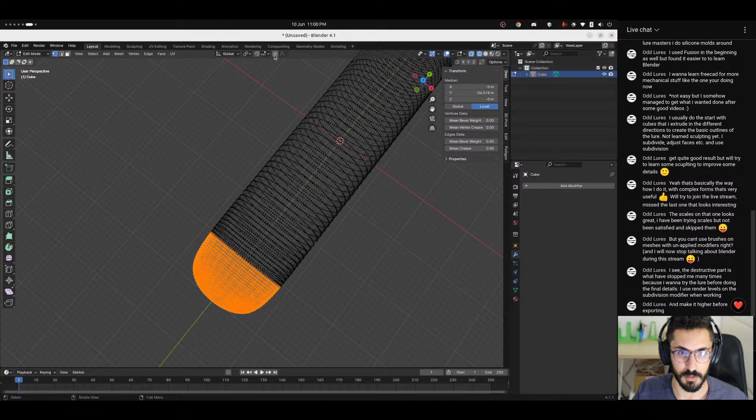Let's say you want to change the shape, make it thinner here. If you scale now, it's not going to look good. But if you turn on proportional editing, then scale—whoops, you can do something like this. Yeah, it's still possible, and you can also scale only on the x-axis, and now you have it scaled down. We changed the shape, even though it's destructive.

So yeah, you technically can. It's not going to be as convenient, but it's still possible, and you can do it in sculpting too—exactly the same thing. Go to the grab brush, make it bigger, and now you can do this, but you want to turn on symmetry. So you can do that, for example, move it out. You can do whatever you want.

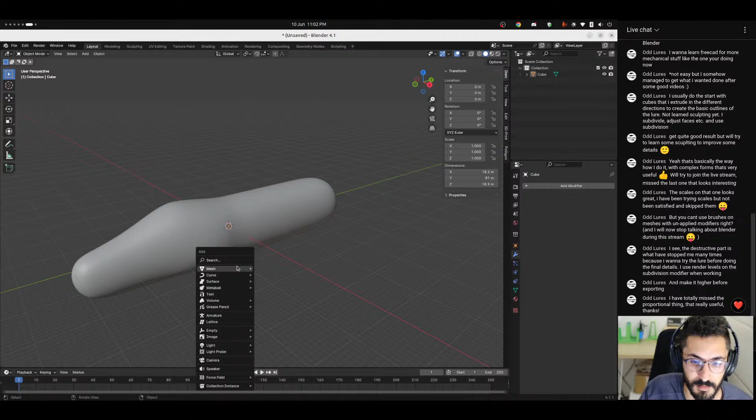Yeah, the proportional editing thing is okay. So when using Blender, you're going to figure out new things every once in a while and say, 'Oh my god, I wish I knew this from the beginning.' Like, do you know about the shrink wrap modifier and what you can do with it? So many cool things. It's here in deform—shrink wrap, yeah, shrink wrap is amazing. Snapping is amazing too. I sometimes use it for the eyes—if we move this here, rotate it on the Y by 90, turn on snapping, auto rotate, and face nearest, I can now move it along the body, put it wherever I want.

It's not rotating correctly, I think. Face project - yeah, face project, sorry, not face nearest. It will even rotate it.

Now, how deep you want it to go? Go to tab and set this to local. For example, show the gizmo. And now move this up. Something like this. Whoops, okay.

Snapping is still on. Local. And then turn snapping back on again. Look at that.

Blender is so fucking cool.

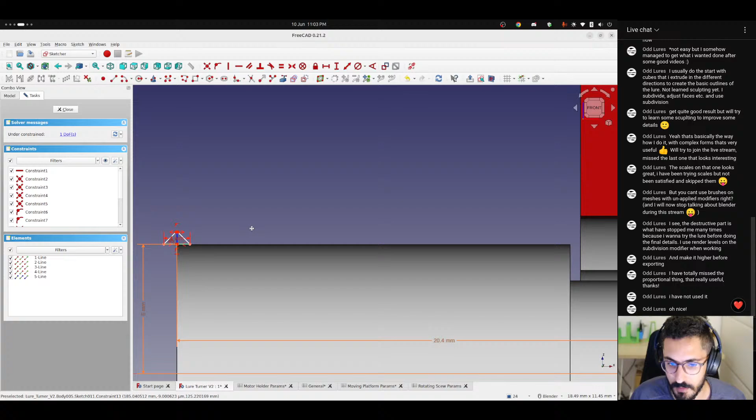Anyways, we have a small problem. So this is 1 mil. I might do it 2 mils. Let me see - yeah, we can probably do 2 mil. Why not? Or 1.5.

No, this is gonna be - how much? Measure this, 0.7. So we can make it 0.6, which is 0.6 divided by 1.5. We can do it at whatever this value is, multiplied by 0.4.

What did I call it? Thread width, yeah, so this can be 1.5. I don't know what the pitch will be, so I'm gonna leave it empty for now. This is the input - let's give it a minimum value of 0.8.

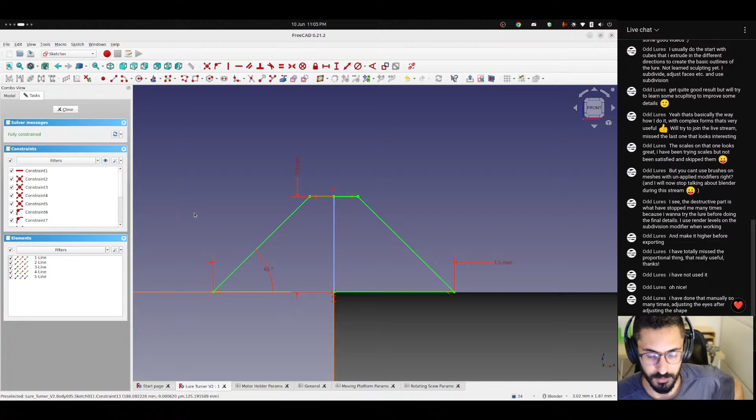I have done that manually so many times, adjusting the eyes after adjusting the shape. Yeah, I know, me too. That's how you learn - you keep doing it manually until you figure out a better way. Sometimes I'm scrolling through YouTube, just watching random stuff, like shorts, and then someone does a thing and my head explodes.

Okay, so we called this one the rotating screw parameters dot thread width, and then we'll do this one at the rotating screw parameters dot thread width multiplied by 0.4. Cool.

So now we want to go here, create an additive helix, and it's gonna break now. So what is the axis? It should be the x-axis. Cool, so cool.

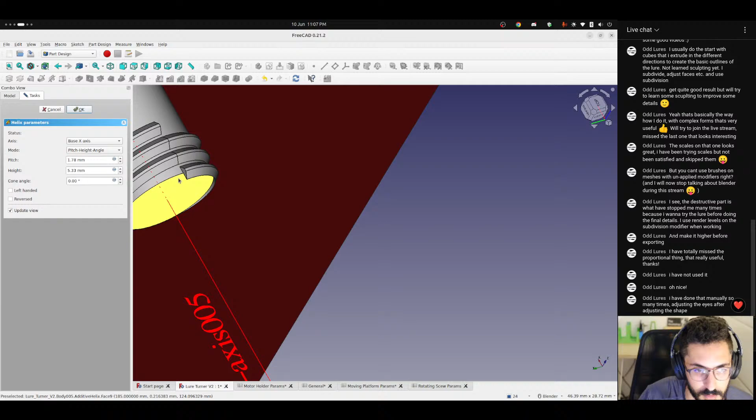But what the fuck is this? So I want it to be like this, but I don't want it to go outside. So I might keep it like that, but then cut the excess, because I want it to start here. Yeah, because otherwise it will not fit. If it started from here, how would it fit into the other one? This part will not get through, the higher part. So yeah, this is how it's gonna be. We'll cut the rest later.

Now we wanna thread it all the way up here. So pitch, height, angle. Height is going to be the rotating screw parameters dot - what was the height? No, screw length.

Okay, oh, now we have to cut this. It's fine, it's fine, we can still do that. The pitch, I don't know - this is too much, I think. Wait, what's going on? The axial distance.

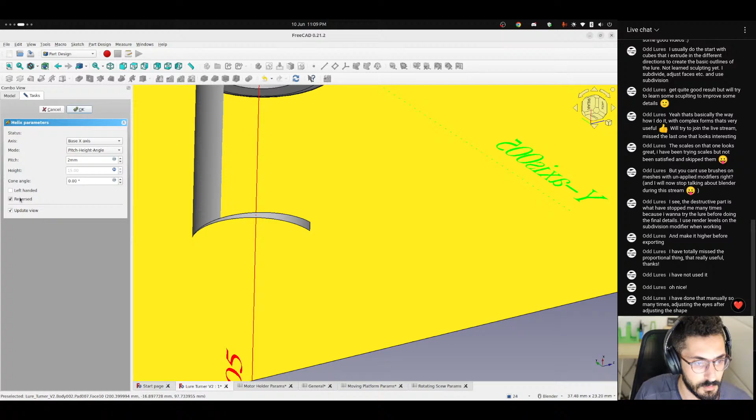What is going on? How much was it? Huh. Interesting. 3. Okay, yeah, that looks fine.

But why did it break at 2? This is 1.5 from here to here. Is that like a bug or no? Oh no, no, it should work.

2.5, does it work? How are we gonna set the minimum value for this now? Based on what? The problem is I have no idea.

The angle of the cone that forms a hull around the helix - a non-zero value turns the helix into a conic. Oh wait, yeah. I think, okay, so basically at the moment we're doing a helix on a cylinder, but you can do it like on a cone, something like this.

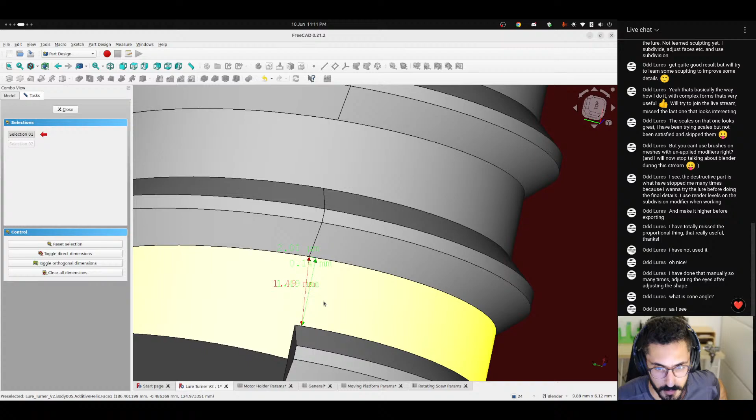And come on, select that edge. This, for example, it's 1.5. And then we have one. Okay, so it's taking it from the center. So the distance from the center of these two lines to the center of these two lines is 3.

We have this entire thing is 1.5. So we have 0.75 and 0.75. That's okay - the minimum distance could be multiplied by 2. Thread width multiplied by 2 is the minimum distance for pitch.

So if we set this to 1, for example, let's call this the input. We should probably also need a maximum value. Let's see, this is going to be thread pitch input, and the minimum value is the thread width multiplied by 2. That would be 3 - 3 is the minimum.

What is the maximum? So we need minimum, and the maximum should be - let's say the maximum is half the screw length. Let's try that. Screw length divided by 2. And this is gonna be the pitch.

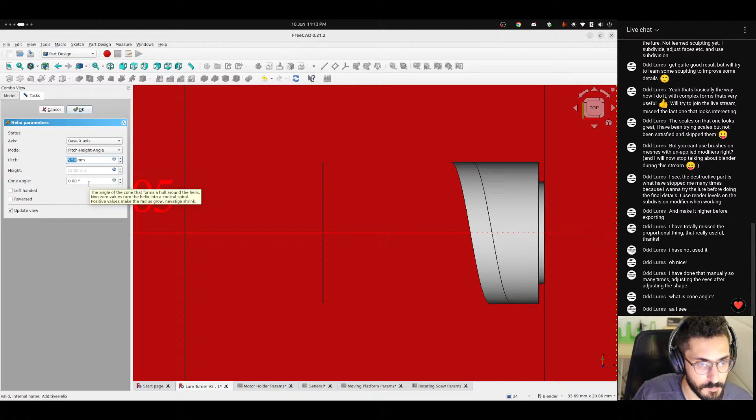What's the error here? Is it doing it inwards or what? Left-handed? No, this doesn't make sense. Nothing is working except 3.

Should we hard code it to double? Just set it here to whatever we enter in the thread width multiplied by 2, but that doesn't make sense. So if thread width is 2... man, FreeCAD. Oh, come on, FreeCAD.

Yeah, it is. Probably because I used 4 edges here to make this. I should have made something simpler, but it shouldn't do that. I've made multiple screws before.

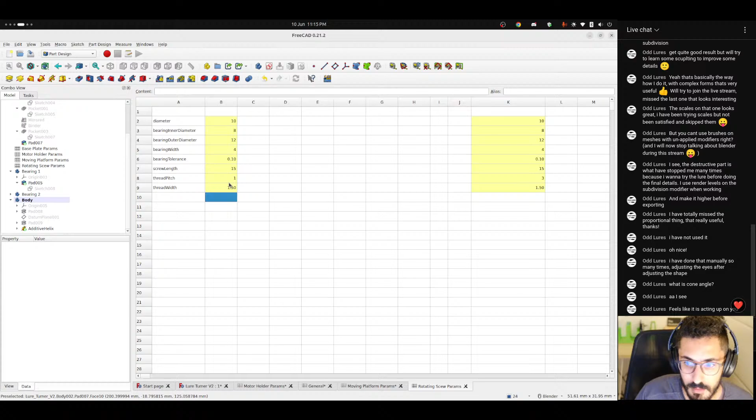Looks like we found the magic number. I don't want to waste too much time on this. I'll debug it later, it's already like 11 p.m.

Now what we want to do is let's start by cleaning up the back so we can hide the moving platform for now, hide the bearing and this bearing. So to clean this up should be easy.

Wait, this is, yeah, we can start from this plane. Create a circle here so we don't clear this part. And this is, what was this? This was the inner... wait. Okay, this is fine. And then another circle.

I should probably memorize the shortcuts, but with the amount of Blender shortcuts that I know, I don't want to mess my head up. So rotating screw params dot diameter, just multiply by 2. As long as it's more than the diameter, we're fine.

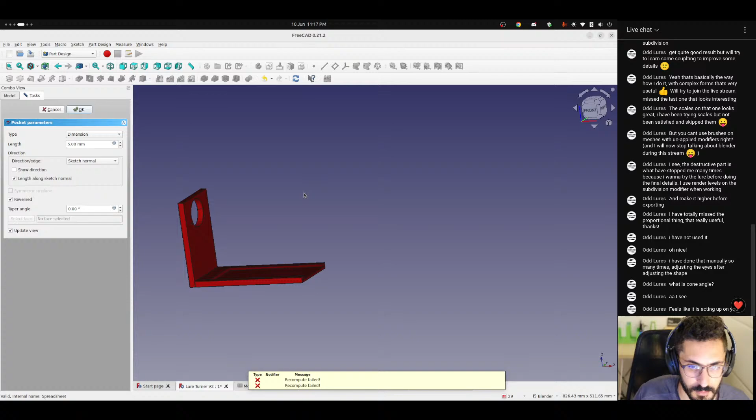Oh wait. Wait. What? No. Show direction, we're along the minus X direction. No. Oh wait, minus X is a sketch normal. We need to reverse it, but it's not working.

Through all, why would it create 2 solids? I don't get it. Sometimes I just don't get FreeCAD. You know what, let me try something else.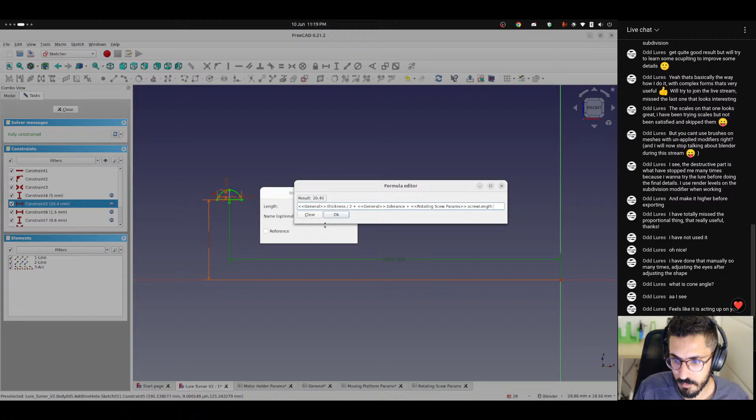No, not circle. Arc. Okay, but... minus. What? Oh no, no. Yeah, I was thinking right. So minus the thread width divided by 2.

Minus rotating screw param dot thread width. It should thread. Yeah, it should work. It's not gonna be.

But let me see now, what's gonna happen if I go back here and change this to 2? Does it like circles? No. It refuses any other parameter other than 1.5. What the hell? Okay, there, fit all.

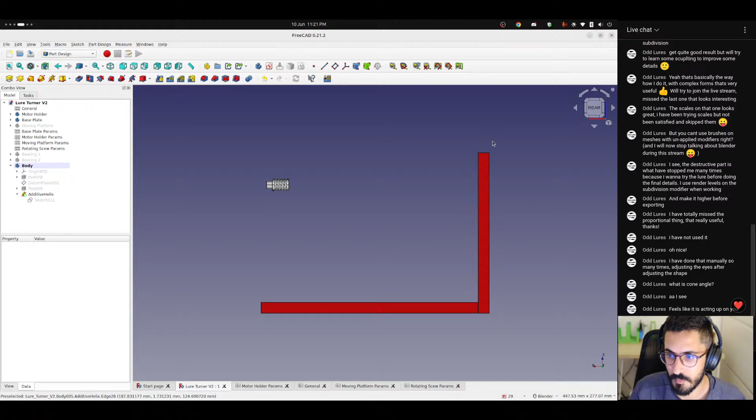Now we need to mirror this. Okay, you know what? I'm thinking of one more thing.

So right here, between these two bearings, we can actually add something to keep the bearings in place, but then we would have to insert the bearings while it's printing, like embed the bearings inside the print, but it would be a lot more stable. Then I would probably need to rework that tolerance, but it's something simple. It's just a cylinder with a diameter between these two to hold this bearing in place, this one and this one.

Let's hide this one. The origin is right here. Where is the origin? The origin is here. Wait, which origin am I seeing? No, the origin is here.

Okay yeah, so we need to create a sketch here, and we need a circle that is constrained in diameter. So I want to get the rotating screw params dot inner bearing diameter, and add to it the rotating screw params dot outer bearing diameter minus rotating screw param dot inner bearing diameter, then take these two together, divide them by 2.

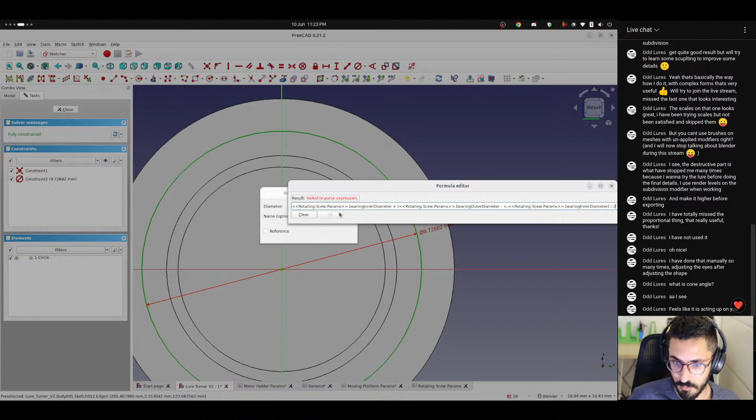Something is wrong. What did I do here? It's exactly in the center.

Close it, and then we can pad it by how much? Let's set it to 2 just so we can see what's going on. Reverse. We need to pad it by rotating screw... screw parameter, no, general dot thickness minus rotating screw params dot bearing width.

We should be... no, interesting. Yeah, thickness divided by 2. So we should be exactly here. And now I can remove general dot tolerance.

Yeah, you know what, I'm not gonna remove tolerance because we already have a tolerance here, so we'll use that. And this is gonna be on the Z axis, it doesn't require that much tolerance. Okay.

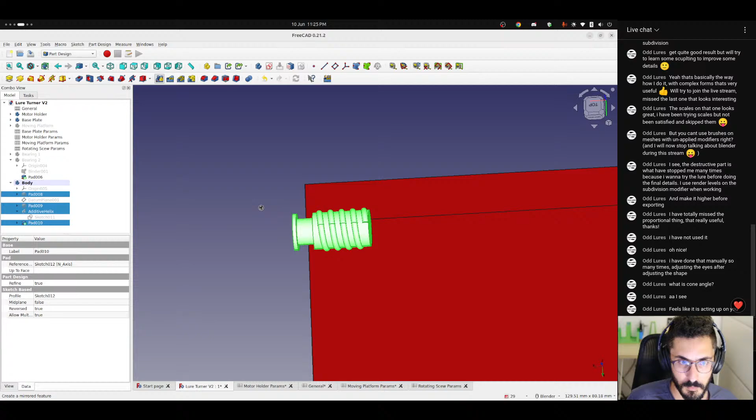Now we need to take this, everything we did, and mirror it. So let's select this, this, and mirror. We need to mirror on which plane?

Okay, what happened? Wait. We need to mirror on the YZ plane. Oh man. No. Why did it do that? What the hell is this?

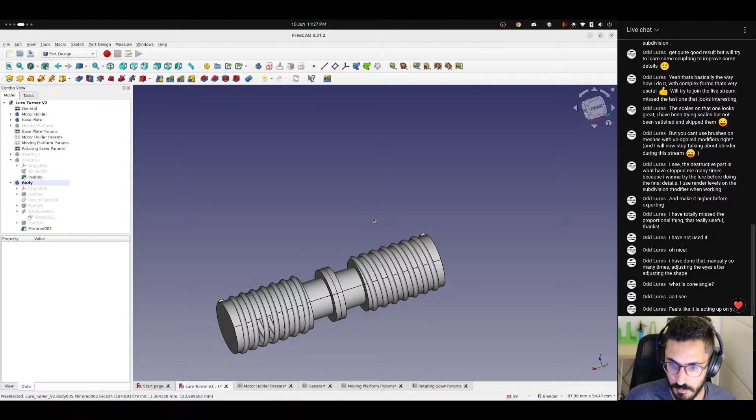Thread pitch, thread pitch is what? It's 3. Let's set it to 2. And then change this to 1. Okay, so at least this now works with 1. But why? Why is FreeCAD doing this? That is super weird.

I am not going to redo this on the other side.

No, black doesn't look good.

I'm gonna keep looking at it, maybe looking on it fixes itself. Let's try to restart. Nope. Is it the refined thing? No, data refine true when we did the helix.

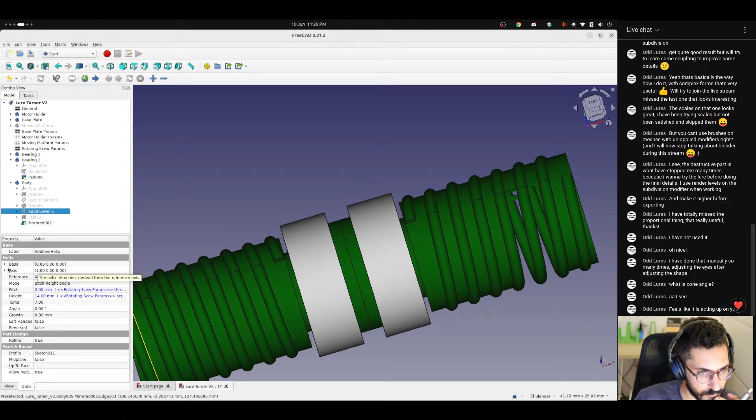So we're doing it on the x-axis: pitch, height, angle. Height, turns, angle. What if we use this height, turns, angle? So we have the height, and let's say we want 6 turns.

Is it doing anything? 6. Interesting. So this works, but oh, maybe it's not. It's trying to calculate the pitch, but it's unable to do that or something. I don't know.

So let's do thread turns. Thread turns input is gonna be 6, for example, and the minimum is gonna be... we need the minimum and maximum. So the minimum is gonna be 1 turn, and the maximum, how are we gonna calculate the maximum now?

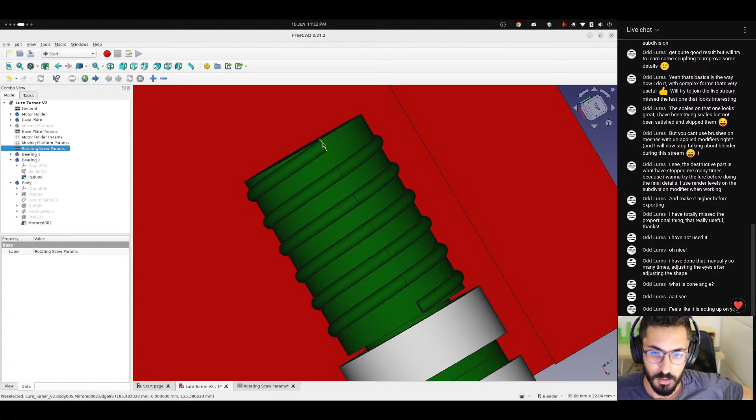First, screw length. No, we can't do that anymore. So the number of turns will definitely depend on the width, right? We have the width. The width here, let's say it's 1.5 mil, or what is it? Is it 1.5? It's 1 mil. Let's say the width is 1 mil. So the maximum is gonna be the height divided by the width, like the length divided by the width. This is gonna fill it completely, right?

Let's see. Screw length divided by thread width. By 2, I don't know. We can do some math.

Wait, let's do 20 just to see some errors. No? What? Oh, wait, sorry, my bad. It's rotating the... I forgot to change the name. It's no longer thread pitch, it's called thread turns. So here it's the rotating screw dot thread, then thread turns. And I have to click OK for it to update for some reason.

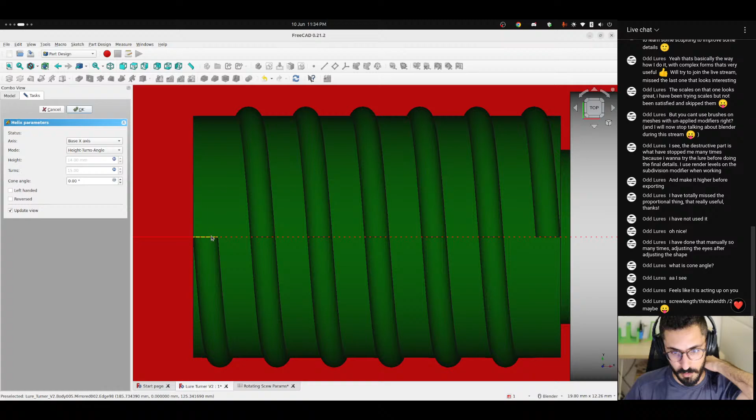So the total length right here between this and this, the total screw length, what does it equal? It equals the number of turns multiplied by the width plus number of turns minus 1 multiplied by the padding between each two, right? So if we want at least 1 mil of padding between the two, we need to write this. We need some notes.

Text editor. So the total length is T. The thread width is W. The thread turns is N, and then the thread padding is P. So T is gonna be equal to N multiplied by W plus N minus 1 multiplied, I'm pressing random stuff, by P.

So P... okay, wait, we want the maximum value for, I lost what we were doing. We want the maximum value for number of turns. We want the maximum value of number of turns that we can get if we want P to be 1. We want P, okay. So we want P to be between 1 and something.

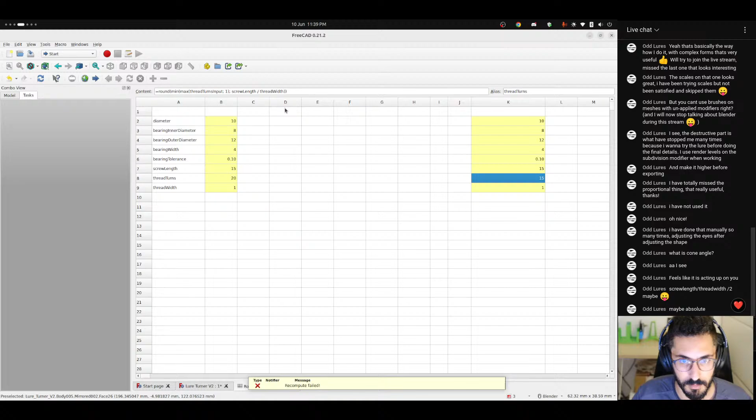Okay, so what was breaking the thing was the decimals. It should be an integer. Absolute? No, absolute will make a negative number positive. We want to turn it into an integer. We want to round it. So yeah, now if I remove this, what's gonna happen? I think it's gonna break. Yeah, it's gonna break. Let's just leave it at that. This is the maximum. I think it's fine.

But this works also. I don't remember how I did it exactly, but if I want to restrict the distance, like the padding, I can just do like padding. I want it to be like between 1 and something, let's say 10. And then if you put this entire equation here, when you do like P equals something, then you put that entire thing here, then you can figure out what is the minimum and maximum values of N, which is cool. Cool. I mean, this spreadsheet thing is super powerful.

Yeah, the decimal thing is very interesting. Apparently you cannot have half a round, you can only have full rounds. Like, these should line up. I don't know why, though. Probably a bug, we should report it to FreeCAD.

Okay, so now let me close this again. So now this can be printed. When it's printing, we can pause at this layer right here before it starts, put the bearing in place, resume it. Then before it starts this layer, put the other bearing, resume it, and then we'll have two embedded bearings. Now, of course, these bearing numbers are generic, I don't know if there's even a bearing with these numbers.

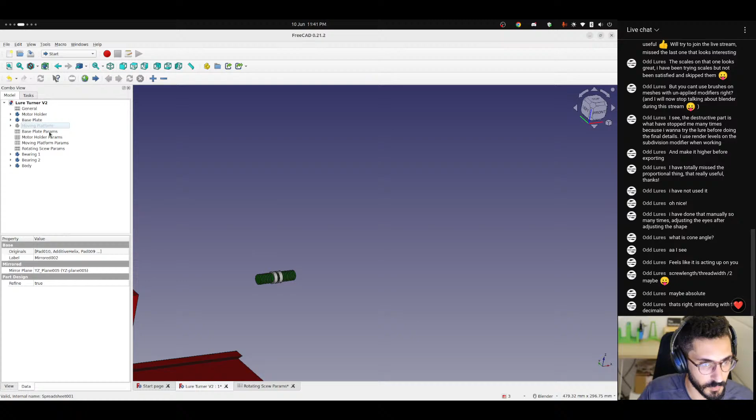I need to check, but now we can update them whenever we want. What else? We did only one thing from the 10 things that I wanted to do today, but it was a fun stream.

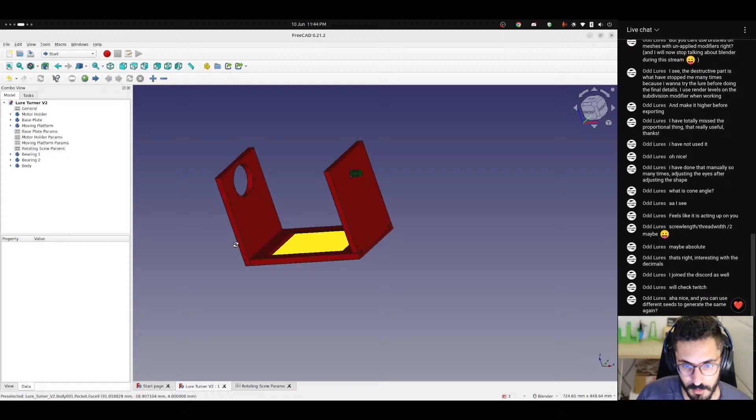Yeah, I mean adding a stepper motor here would be cool with some enclosure, maybe a fan to cool down the motor, an Arduino board down here with a switch and a couple of, oh my god, that would be amazing. I'll think about it, maybe we'll do it. I think I'll go for it.

This has to be bigger, of course, to house the stepper motor. It should be just a small pancake motor, I think. Will be plenty enough.

Yes, yeah, you can use seeds.

Game development is interesting, very interesting, and I've only recently started getting into it. I did at one point in time, like way back 6 or 7 years ago, try game development, but I wasn't as good in programming as I am at the moment.

So yeah, time to sleep so I can get up for work tomorrow. Well, I wish I could say the same thing, but I was laid off, so I still wake up early. So yeah, we do have to sleep. Will be fun to watch either way.

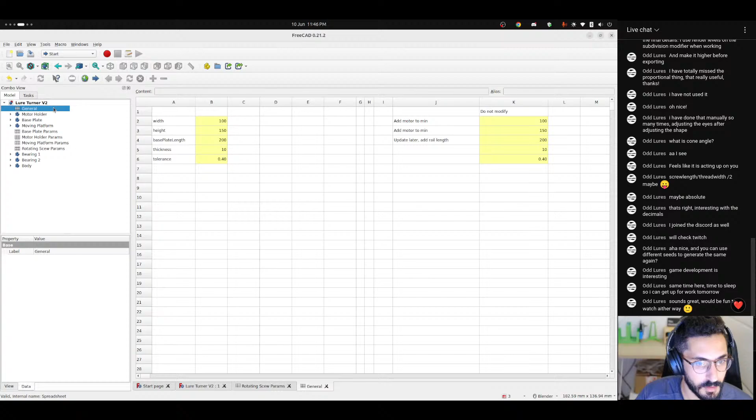I'm glad we fixed this thing. There's one bug that I haven't fixed yet, which is, I'm gonna save now so I don't break it, but if I change the width to like 200, okay what, now it's fixed. What? It used to break for some reason. This thing.

FreeCAD is super weird. Super weird, but okay, now it broke or what? That's definitely not 150. Oh my god, and it's saved. Okay, now it froze. 150 with 100. Okay no, it's working. Anyways, that's it.